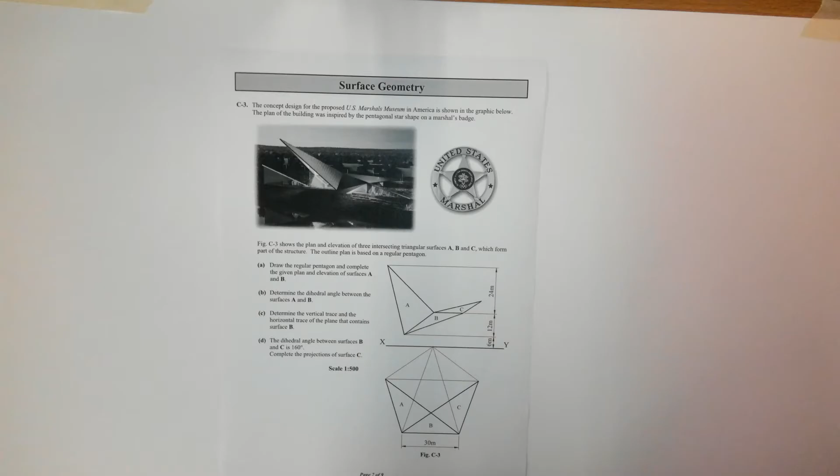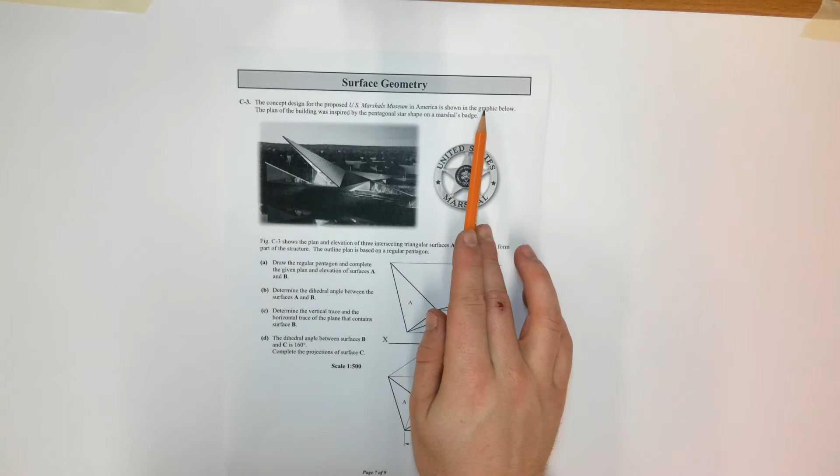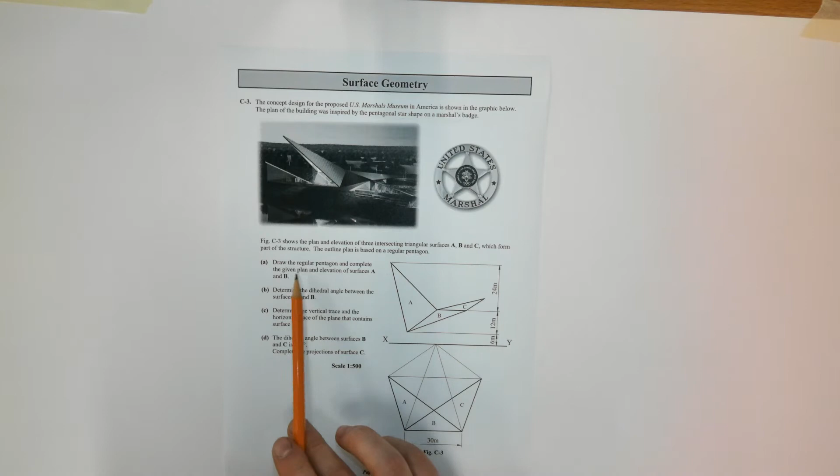Okay, welcome to the 2014 question C3 on surface geometry. The US Marshals Museum in America is shown. The plan of the building was inspired by the pentagonal star shape on the Marshals badge. So draw the regular pentagon and complete the given plan and elevation of surfaces A and B, and then determine the dihedral angle between A and B.

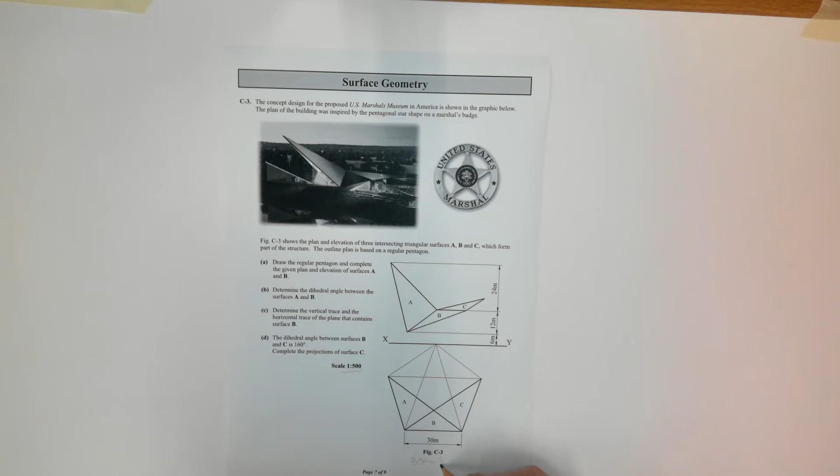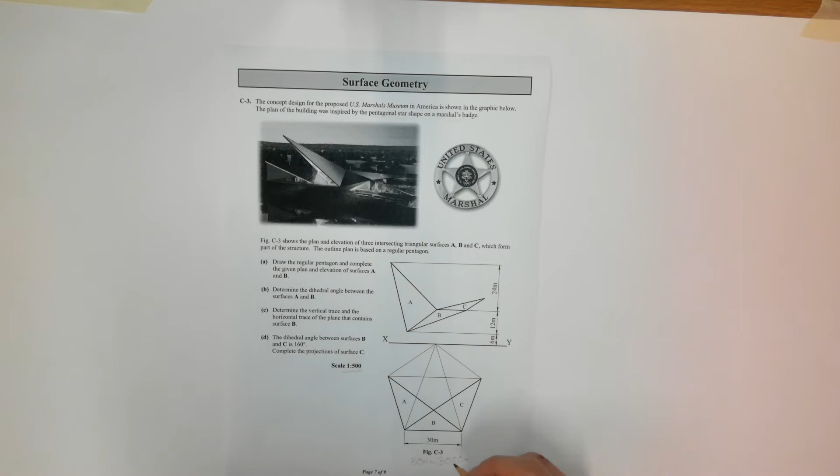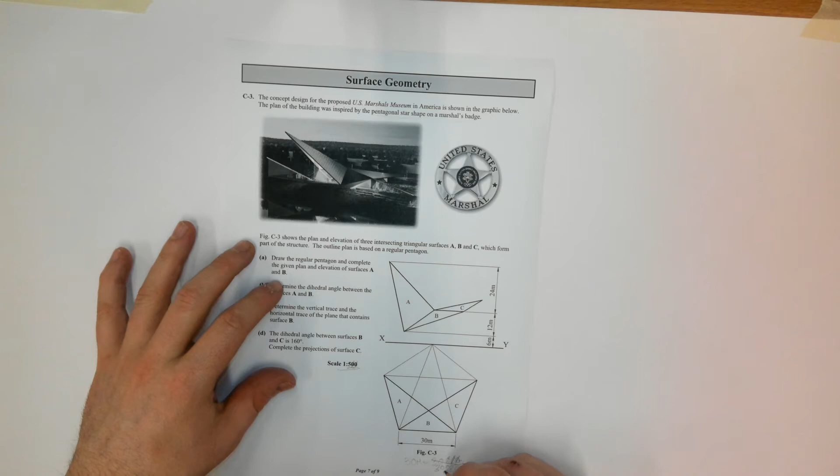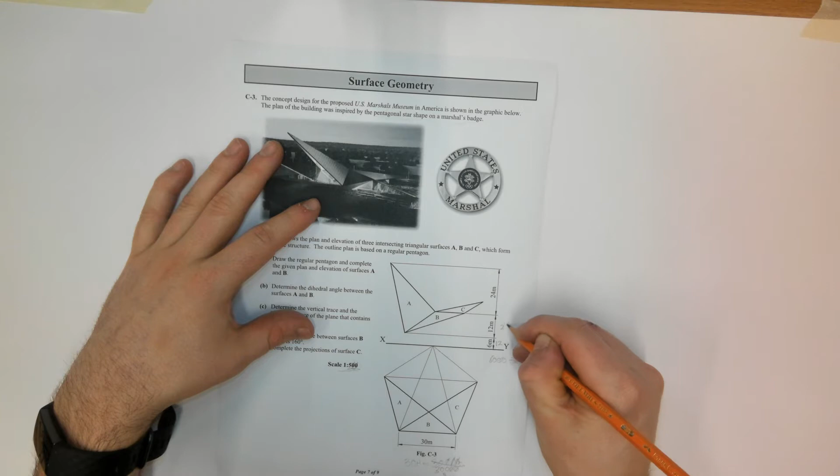The scale is 1:500, so 30 meters equals 30,000 millimeters. You've got to convert everything into mil, then divide by 500. We're going to knock two noughts off it. So 30,000 millimeters, knock two noughts off, then divide 300 by 5, which is 60. Then 6,000 divided by 500, knock the two noughts off, so that's 12. This is going to be 24, and this is going to be 48 millimeters.

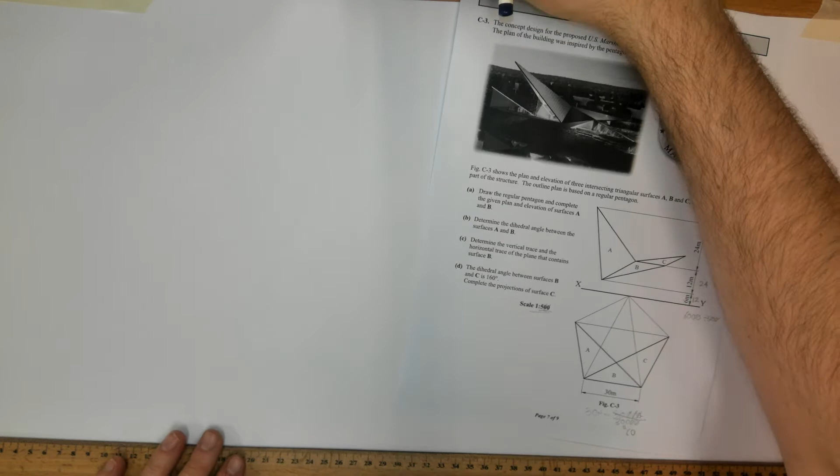Okay, so we're going to get started. We are going to have to draw the pentagon in plan first. So the size is 60 millimeters.

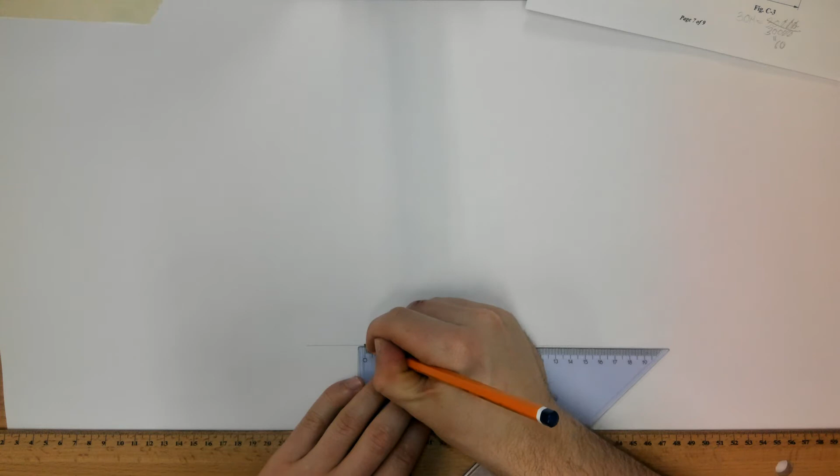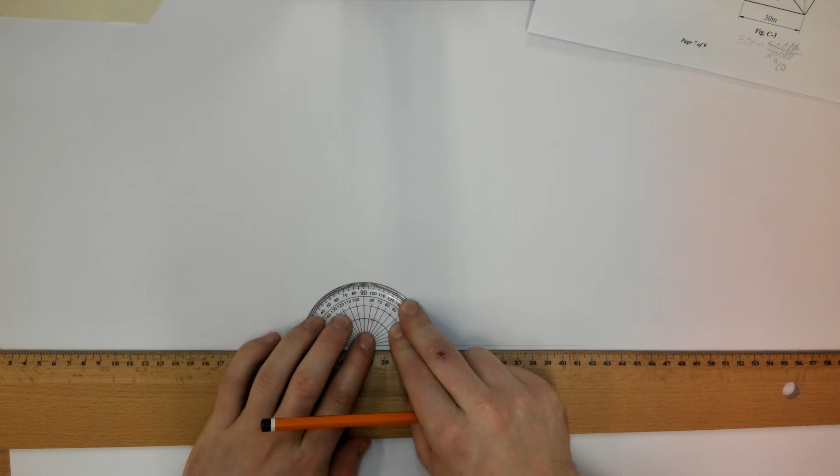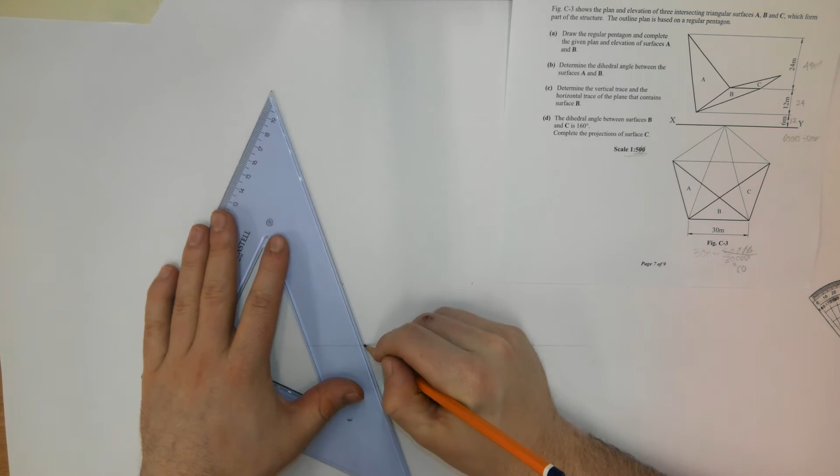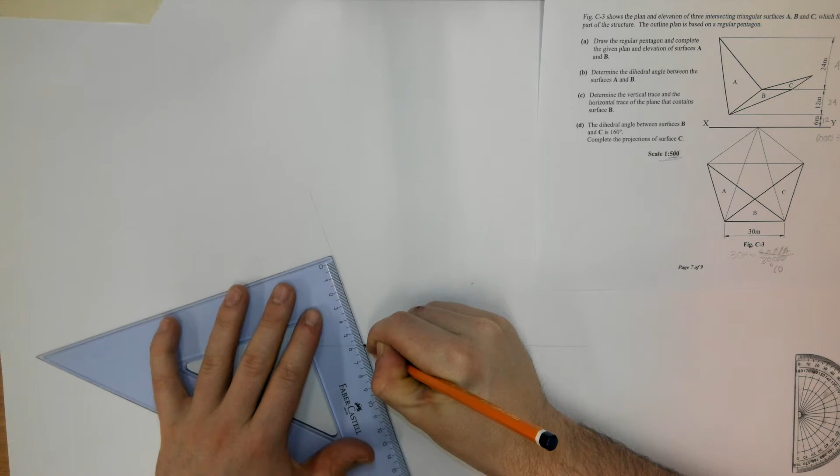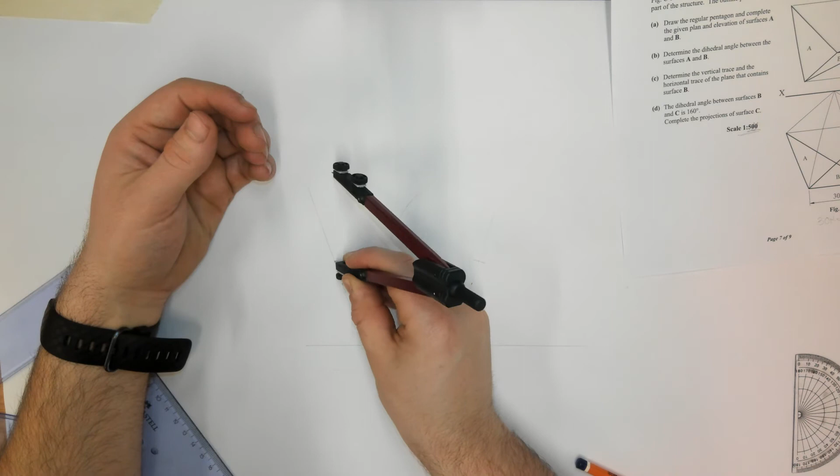So 60, and my compass - the external angle of a pentagon is 72 degrees, by the way. Careful that you don't mark 108, that's a common mistake students make. Now you can join the diagonals there.

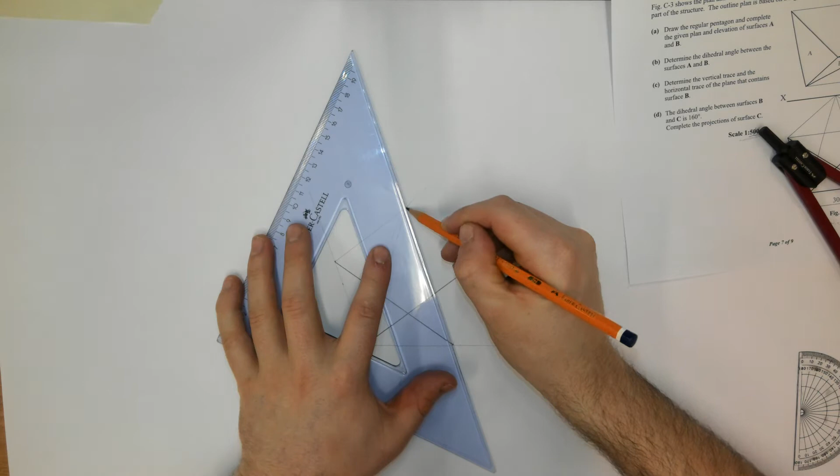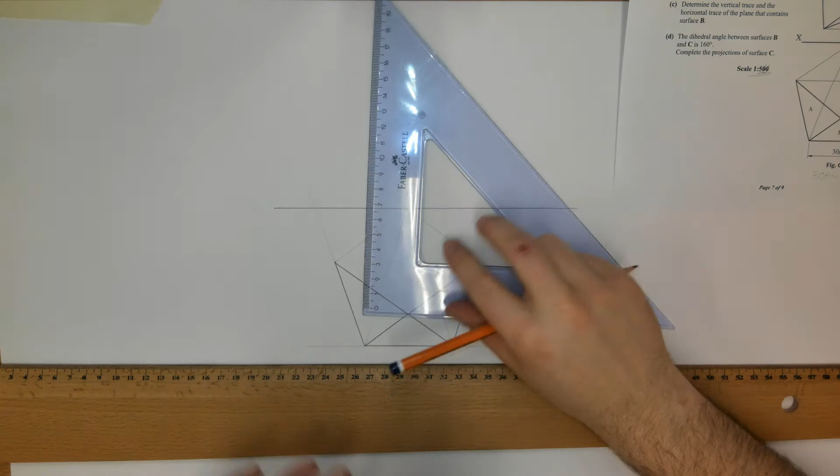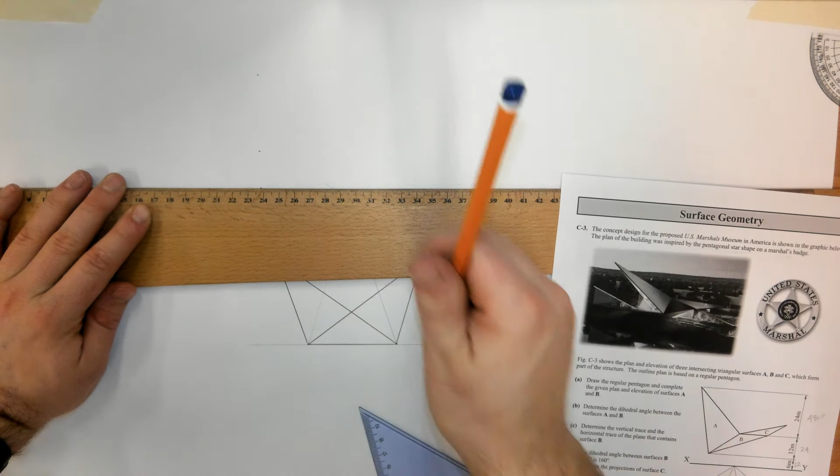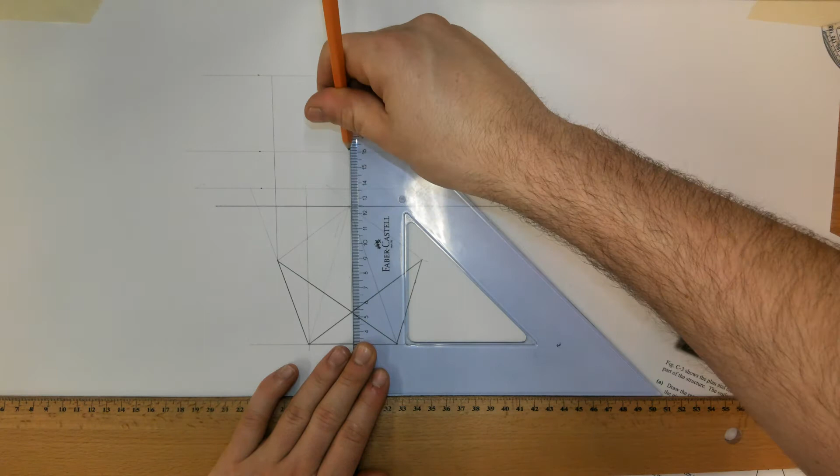So the XY line is touching the apex of the pentagon. So we're going up 12, 24, and then 48. So there's the points being brought up. So this is surface A. Here's the elevation of surface A.

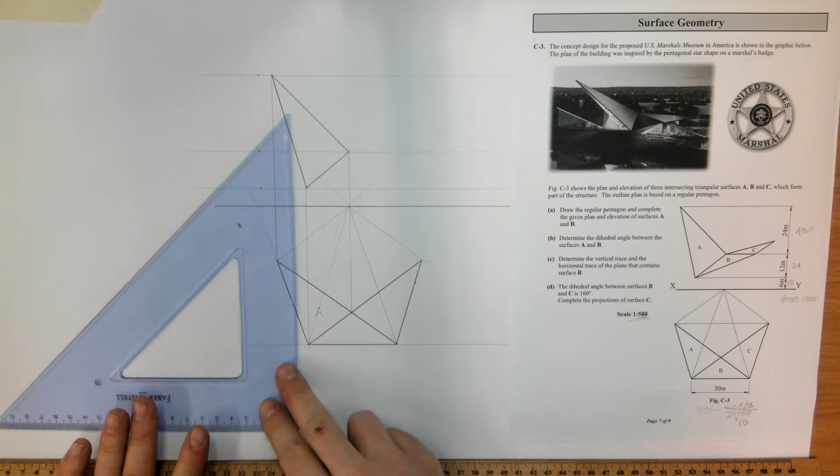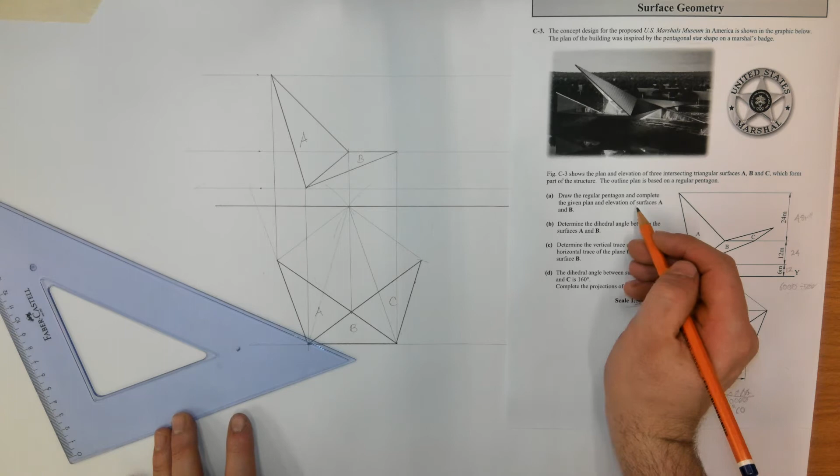Now surface B, straight up to here. So there's A, there's B, and there's B in plan. So now it just says draw the given plan of A, B and C, and draw the elevation of surface A and B - you don't have to do C yet. Determine the dihedral angle between surfaces A and B. So here's the line of intersection - is it a true length already? In either view, no, because it's not parallel to the XY line.

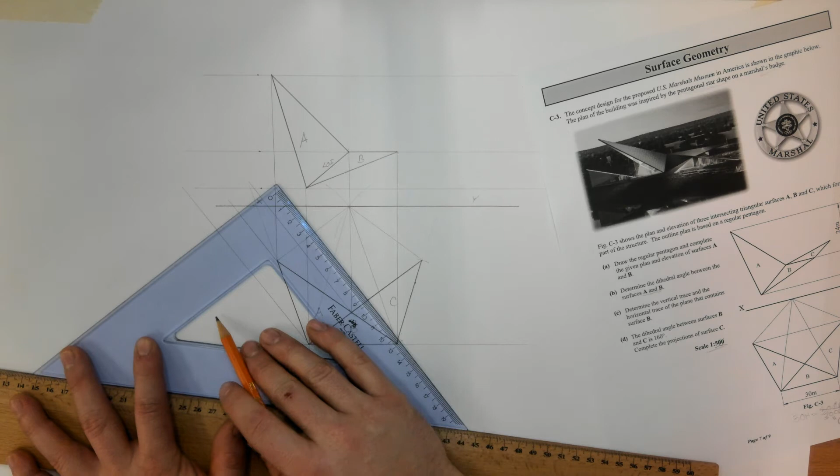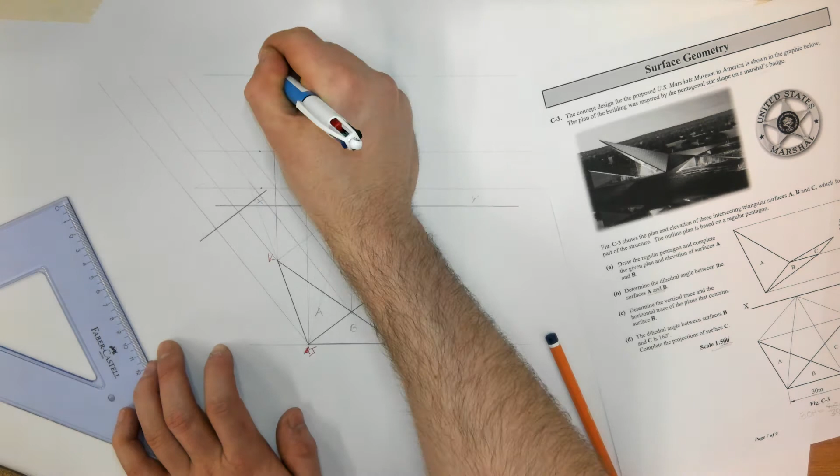So I'm going to look perpendicular to the line of intersection to see it as a true length. I'll take my heights from elevation. Now I'll label the points as well - J, K, K, J, L, L, P, P, and then point Q.

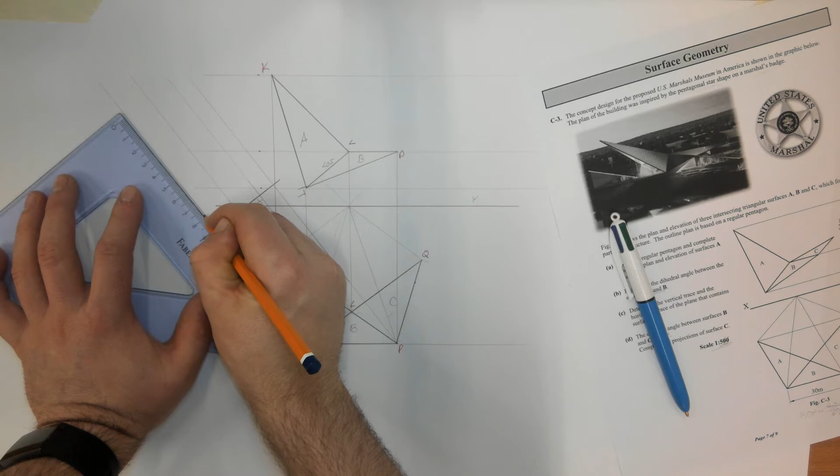Right, so we can take our heights from elevation. Now you don't need to bother using your compass when they're simple heights like 12, 24, then after the 12, and then 48 afterwards, because it's just all speed. You know the heights, they're simple heights to mark. If you want to use your compass, it's not a bother.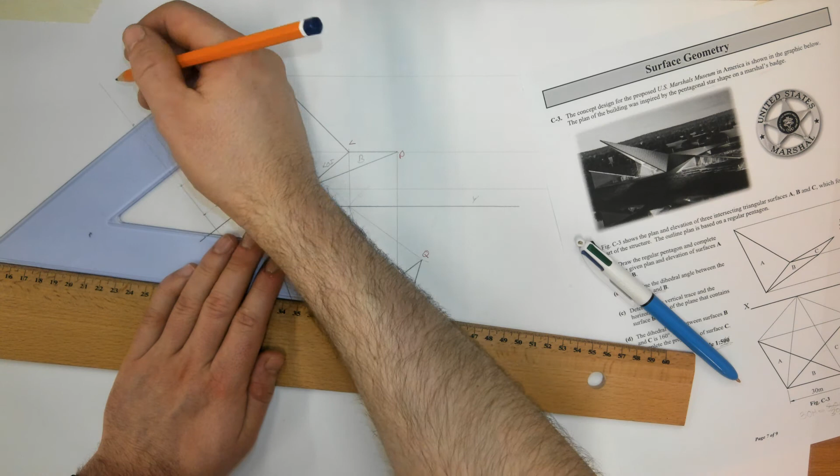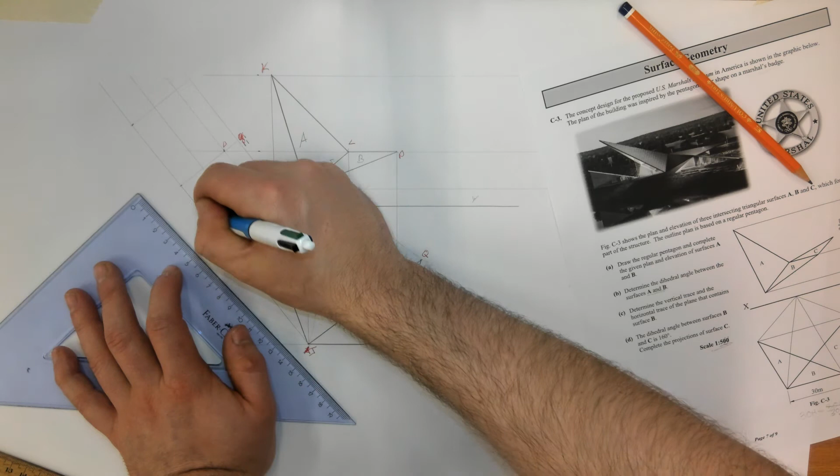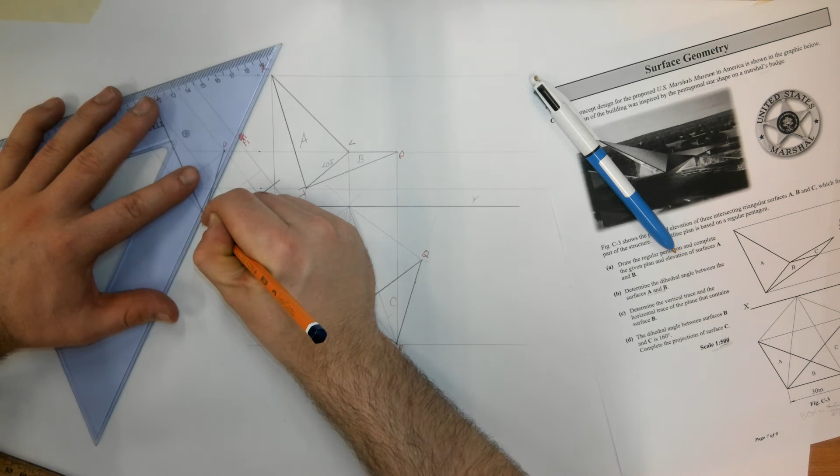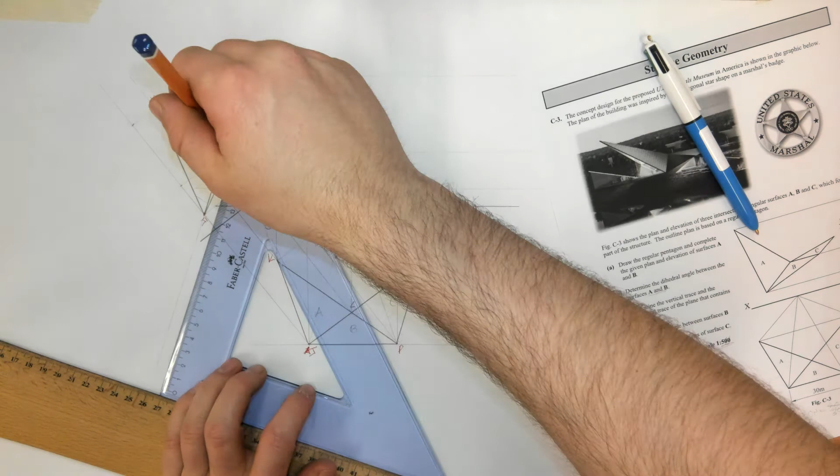So we're going to look along that line of intersection because it's a true length. Here's our X2, Y2 line.

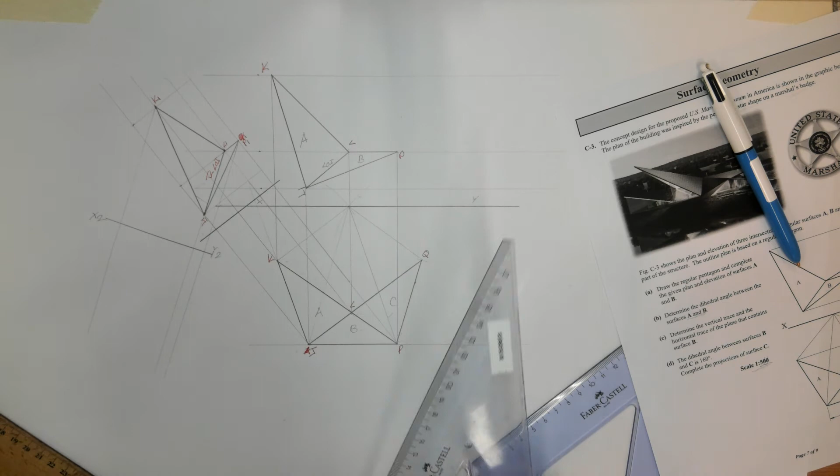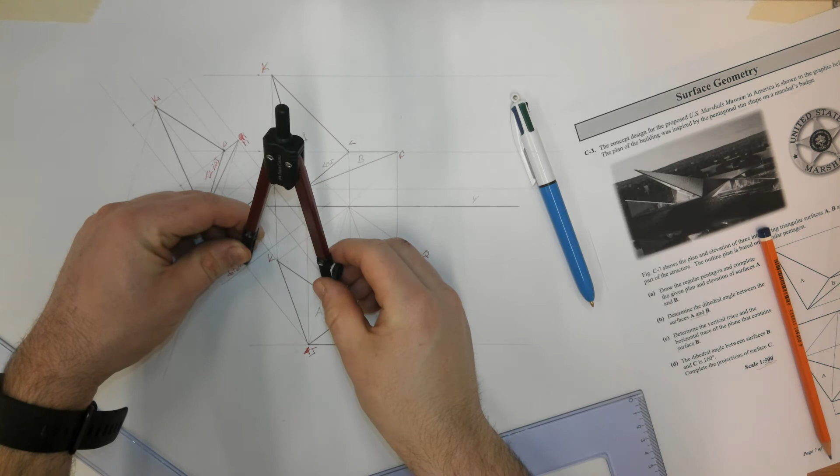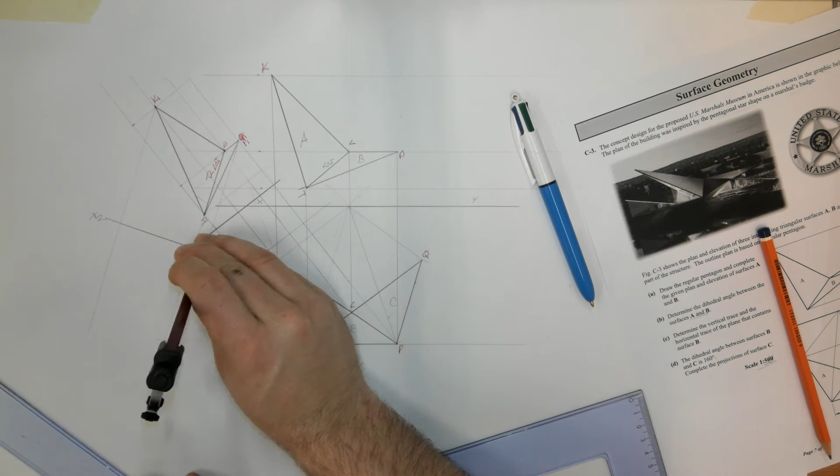So for our second auxiliary, to get our dihedral angle, we're going to take the distances from the X1, Y1 line back. We can use a datum line to shorten the amount of distance we need. So compass on the datum, compass back to J, lift, find J here, mark it in. L is the same, so lift with L, mark it in, there we go, same point. Point P, compass on the datum line, bring to P, lift, find P1, follow it along, mark it in there. The same with K now, K on the datum line, bring the compass back to K, lift, mark it in here.

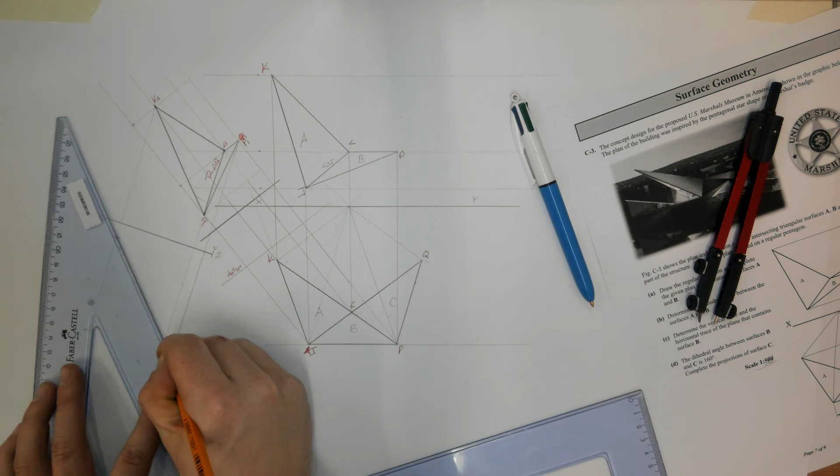And then here's an edge view of the two surfaces, their dihedral angle - a little bit inaccurate there for me. So then take your protractor, measure the angle, write it in, 150 dihedral angle. That's surface A, that's B. P2, L2, J2, K2. So that's that part done.

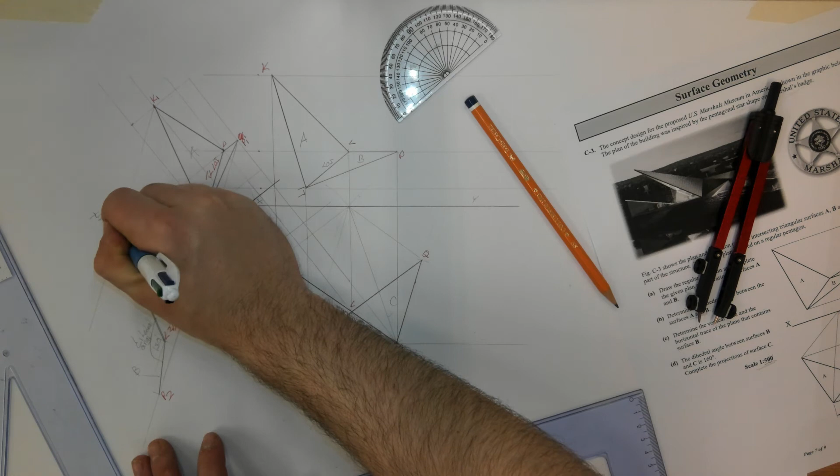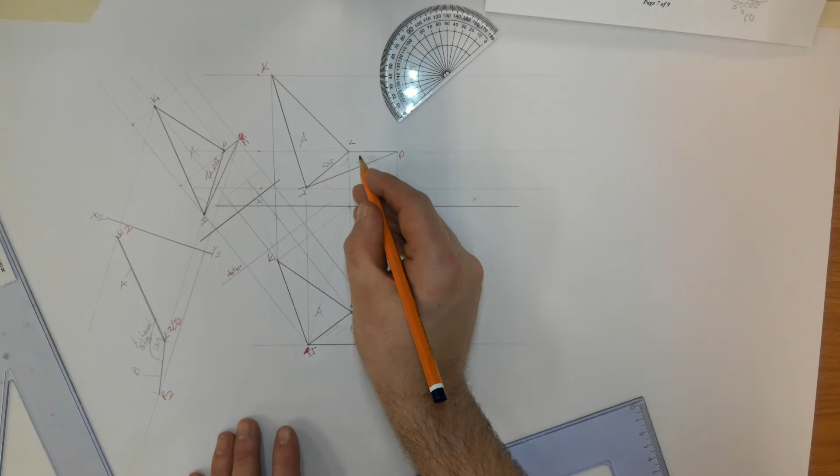Now the next one is determine the vertical and horizontal traces of the plane that contains surface B. I love these questions, right? So this is surface B. Now we're going to get an edge view of this surface here, an edge view of that surface. Where is my set square?

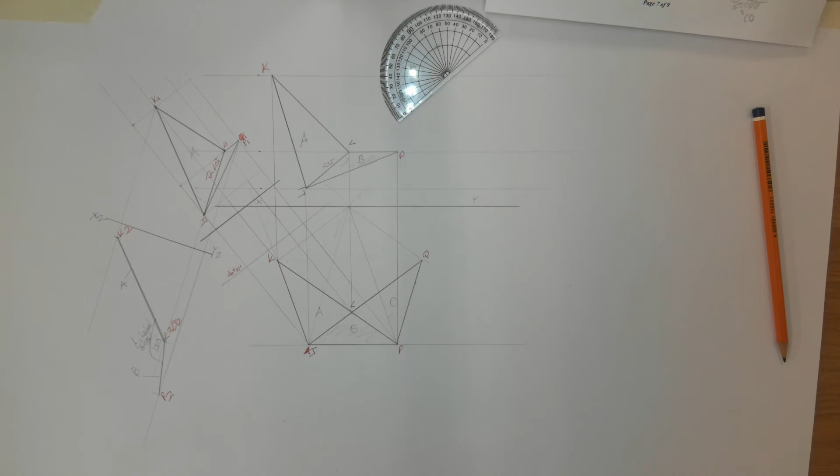So line LP is horizontal in elevation, so it's a true length in plan. I'm going to look along line LP because it's going to appear as a point, and the surface will then appear as an edge. So I'm going to look along line LP.

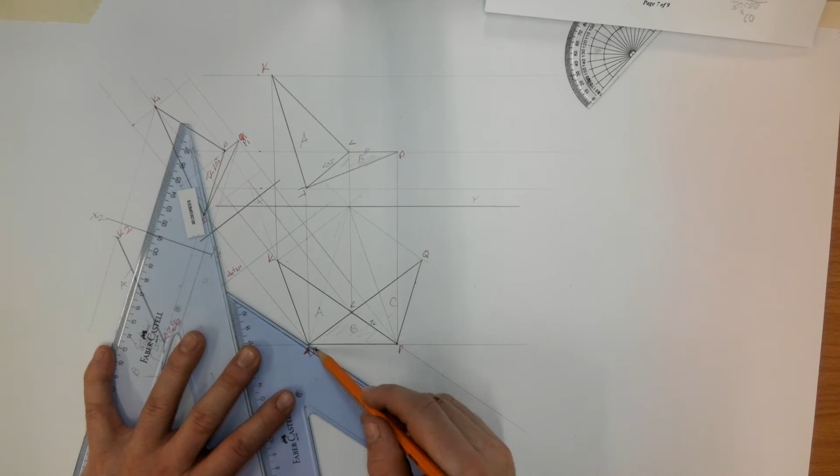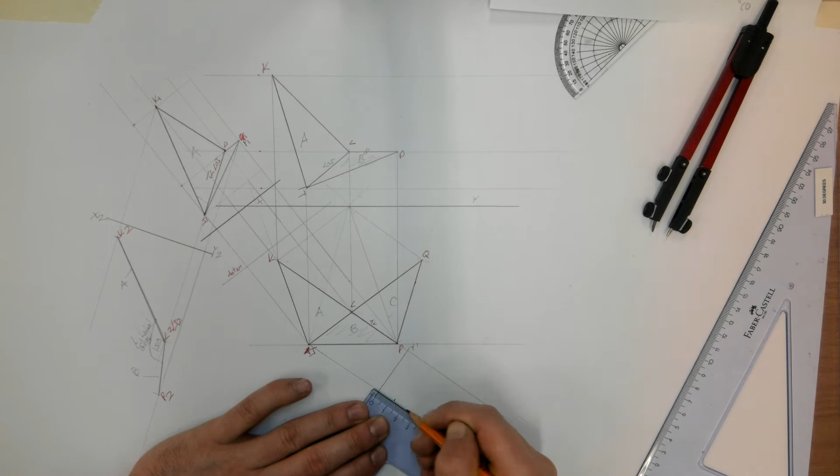X1, Y1 line. I'm going to mark in my heights here. So J is at a height of 12 up from the X1, Y1 line. P is at a total height of 36, 12 and 24.

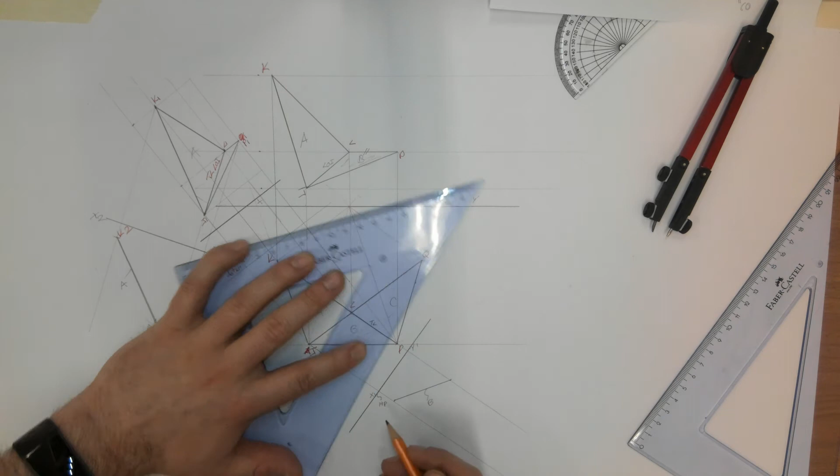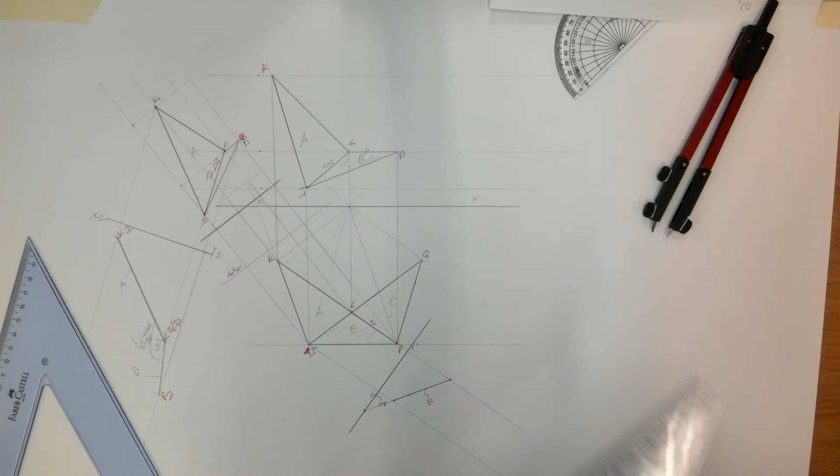Now here's an edge view of surface B. The X1, Y1 line in the auxiliary elevation is an edge view of the horizontal plane. So if you extend this X1, Y1 line and extend this edge view of the surface, this is the point view of the HT, because it's where the surface intersects the horizontal plane, and the line of intersection appears as a point.

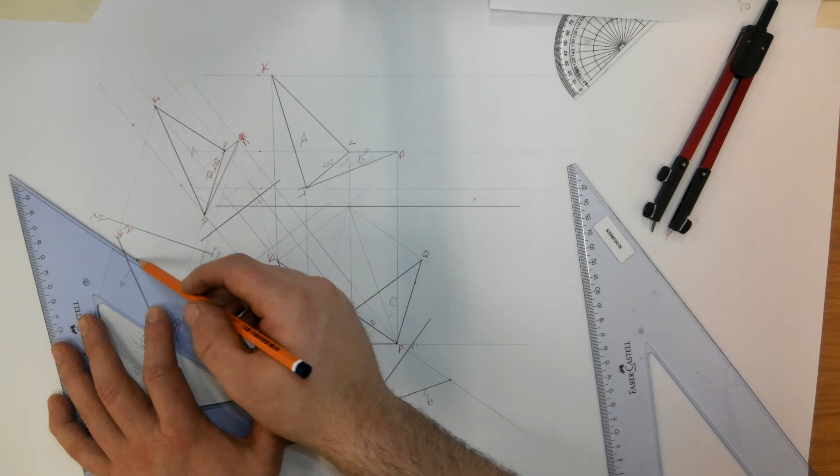So now we're going to project that point view back. So we are here. So here's the HT there. Okay, so there's the HT. Now, okay, we could continue that along there, all the way up to here. Continue our Y line. There's a point view.

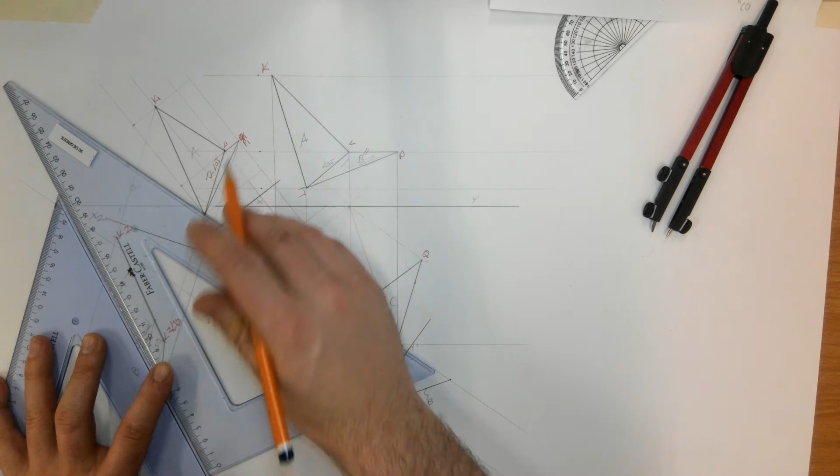There's T. And then to find the VT, I could draw my line parallel to the HT through point L, then where L hits the XY line, go up and across, and then from point L go straight across from L. Where they intersect, join towards T. So this will be the VT.

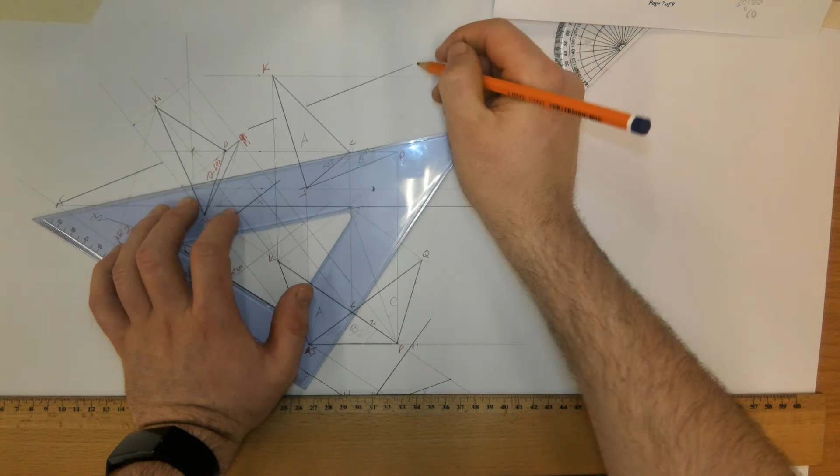There's the VT there. But what if there wasn't an awful lot of space, like if you hadn't got a lot of space on your sheet for this? Well, what I would do is draw a line in plan parallel to the XY line, find the elevation of the line, and look along it because it'll be a true length.

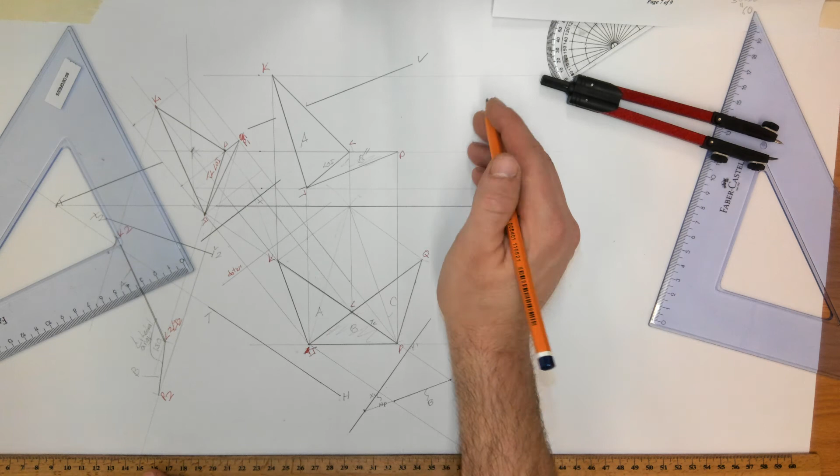So JP is parallel to the XY line, so it's a true length in elevation. You could look along line JP. Okay, you don't need to do this now, we've already done it, but I'm just showing you. So look along line JP. I don't have enough room there.

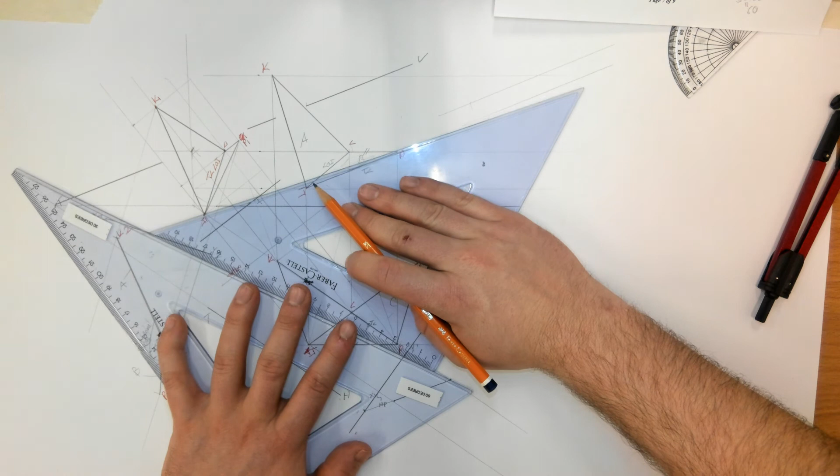Take your distances from your XY line down to plan. So compass on the XY line down to L, lift, mark it in on L. Then the same with P. There you go. Now, extend on this surface here.

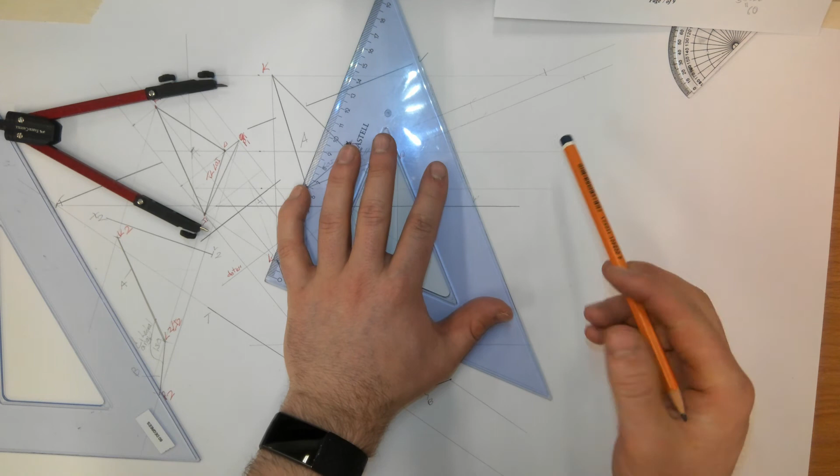Then here's an edge view of the surface. You can extend that on there. And there's a point view of the VT. And then just project it back at the same angle. And that's the most robust way of getting it.

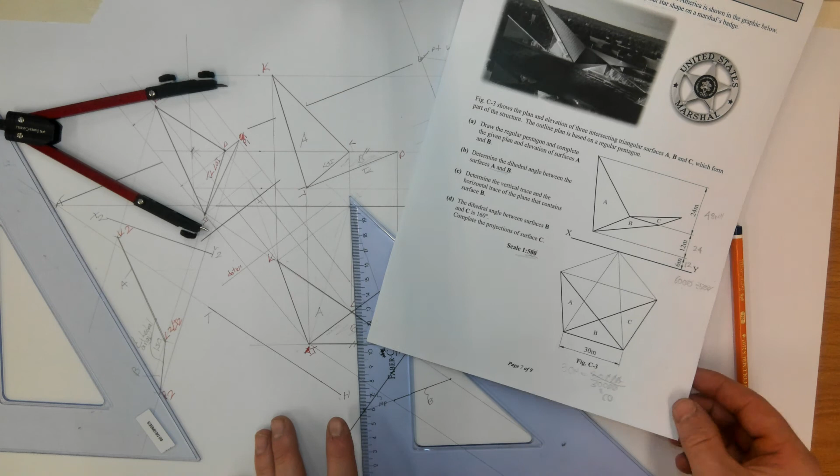Right, the dihedral angle between surfaces B and C is 160. Complete the projections of surface C.

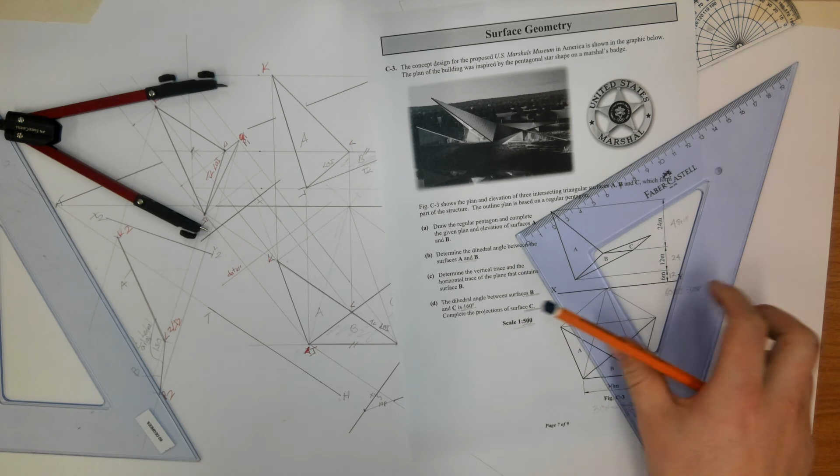Right, so here's the line of intersection LP for the angle between B and C. Now, you need to see the line of intersection as a point, and to see the line of intersection as a point, you look along its true length.

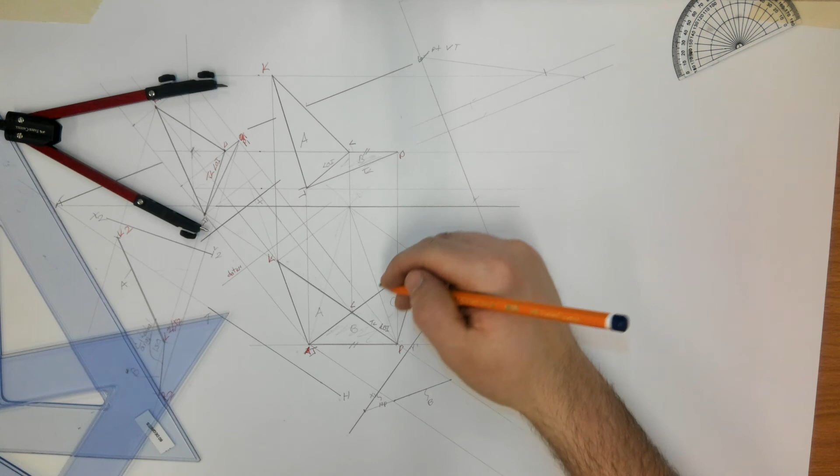Now it's a good thing that the line of intersection is parallel to the XY line in elevation, so it's a true length in plan. So I can look along this already, and I can actually use my auxiliary from my old part of the question. And it says the angle is 160.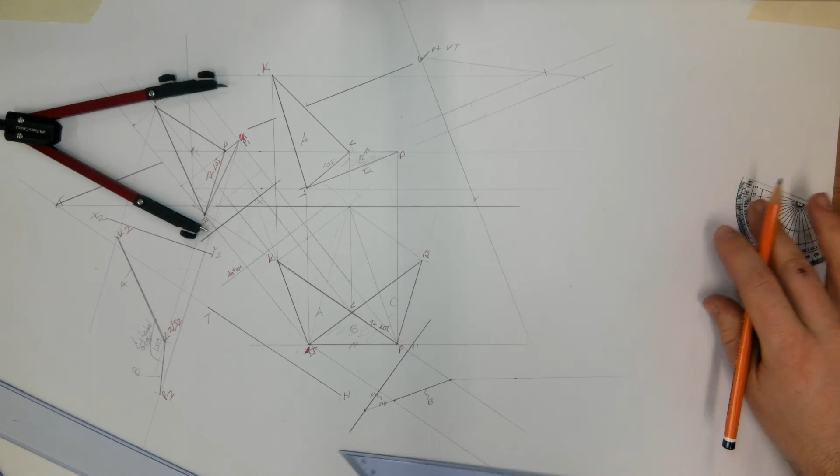So I'm going to apply that angle of 160 to it. Okay, and I have two possible ways of doing it. I can go this way, or I could go this way. So I could go 160 this way.

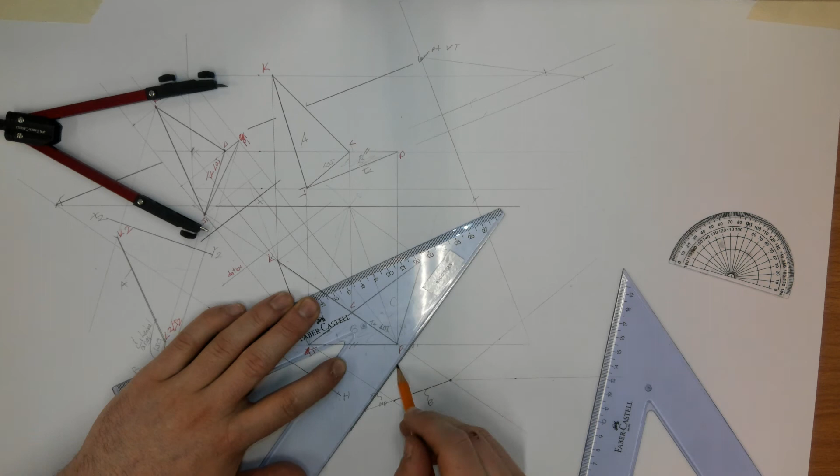Somewhere along these two lines is going to be point Q. Now, if we wanted to get point Q in this auxiliary, well, I project it parallel to line LP, because that's where all the points are going. So it has to be on one of these lines. Now, you've got to note to yourself, this is an auxiliary elevation.

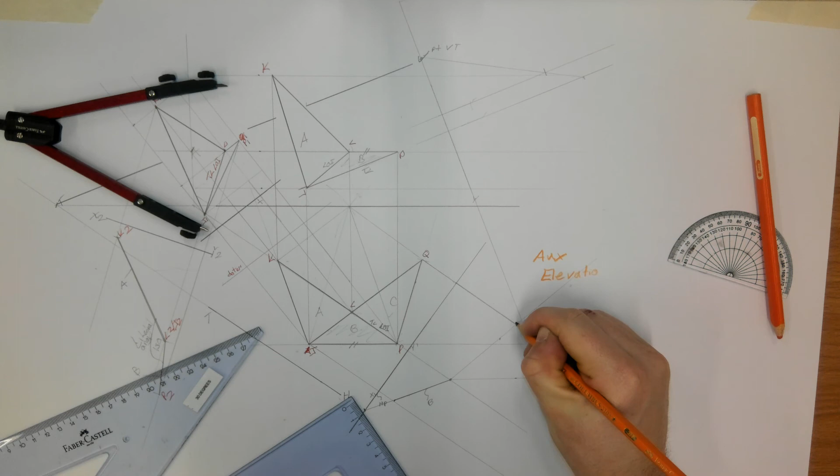So you would take the heights for this Q from there. Okay, now this is one possible solution for Q: Q1. Or this is a second possible solution, Q2.

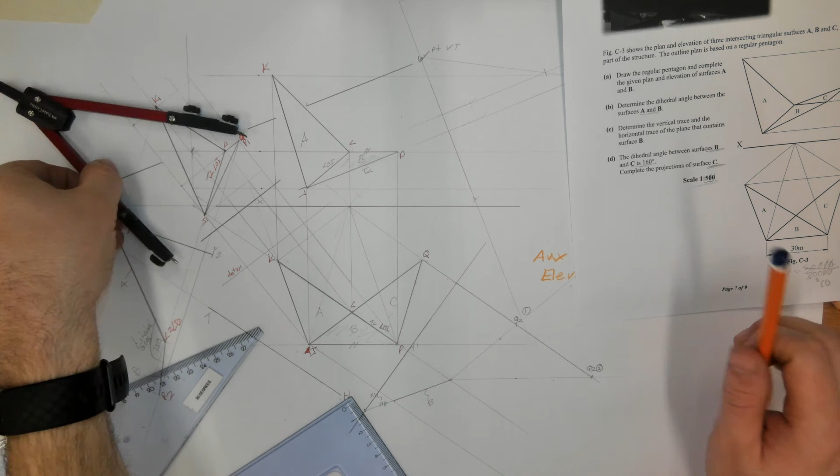Now, the one you pick has to match this here. This is way too high of a height. Q2 couldn't be the answer, or solution 2 couldn't be the answer. It has to be solution 1.

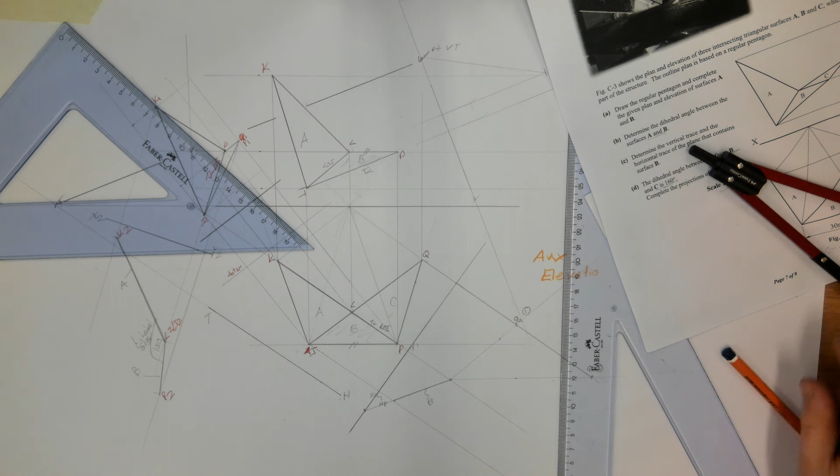So I'm going to take my compass here, lift, that's the height of it. I'm going to bring Q up, and I'm going to take my compass, mark it in here, and then I can join the points there, and that's the projections of the elevation of surface C.

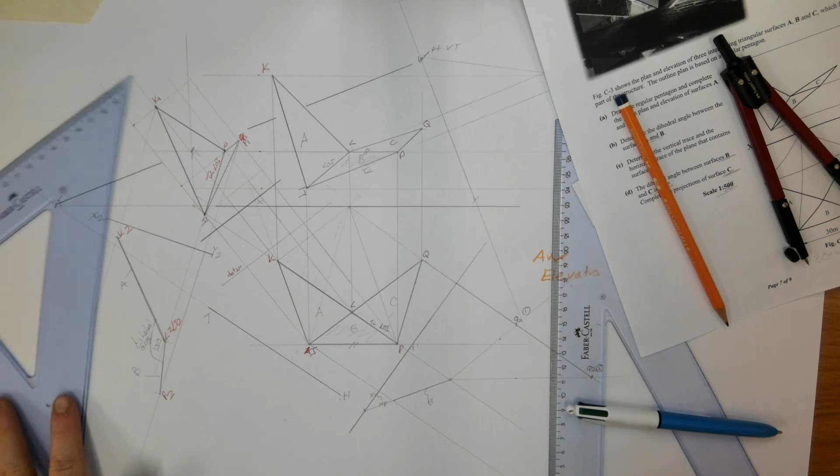Now, there's the question done, and that was, without a doubt, class.